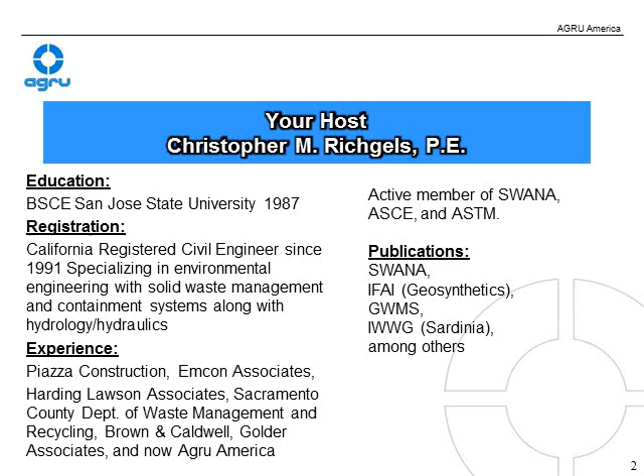I spent time with engineering consultants, Emcon Associates, Harding Lawson Associates, Brown Caldwell, Golder Associates. Also a stint in the public sector with the Sacramento County Department of Waste Management and Recycling, and I now consult to Agru America. I'm an active member of SWANA, ASCE, ASTM, and have publications in various trade shows and magazines as listed there.

Today we're going to have an introductory presentation on geosynthetic capping systems. This is part one of likely a four-part series on this topic. This first introductory phase is going to present some of the history of the geosynthetic industry and materials and how we got to where we are today, and just some of the issues involved with capping systems.

Now there's different capping system versions. First of all, there's geomembrane and soil composites. Pretty common, everyone's seen them. They're in use all over the United States and Canada and across the world. They, however, require soil depth suitable to the selected vegetative community required to hold the whole system, the topsoil system, together. Stability is based on veneer interface strengths.

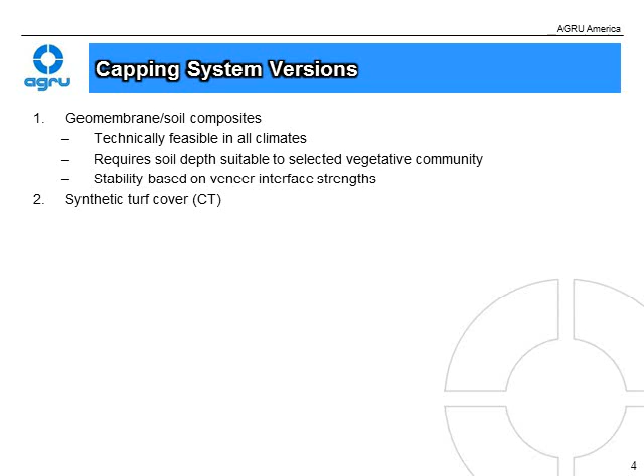And then there's the synthetic turf cover, or in Agru's case, the closure turf final cover system, wherein the synthetic turf replaces a soil erosion protection layer. It protects the underlying geomembrane from UV radiation, and stability is a lesser concern than with the geomembrane soil composite, other than landfill gas pressure forming beneath it.

In landfills, then there's exposed geomembrane covers. These are by far the cheapest alternative using geosynthetics. They are, however, subject to ultraviolet degradation, so they're really nothing more than a temporary cover. Stability is a lesser concern other than wind uplift, hence some exposed membranes you'll see anchored down with sandbags on ropes, or percussion anchors, called Platipuses, which can be driven into the subgrade soil to help hold the whole system down.

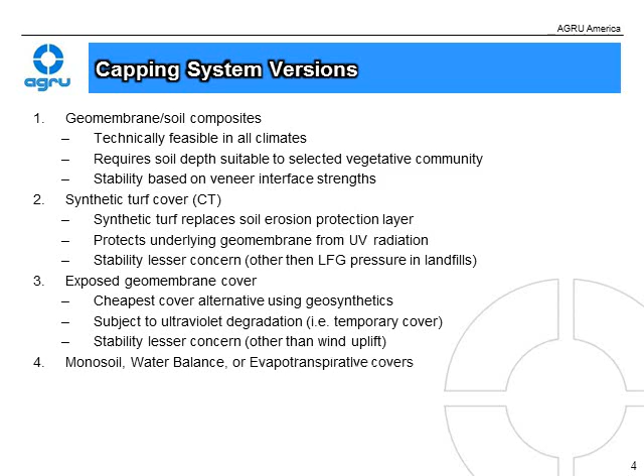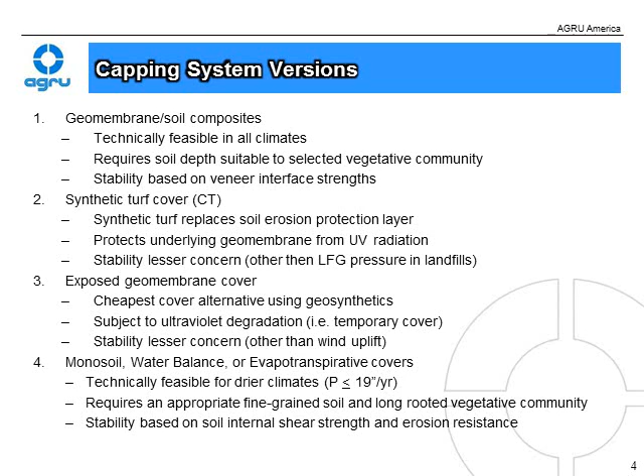Then there's the monosoil, or water balance, or evapotranspirative cover, depending on what theory you prescribe to. These are technically feasible for drier climates, in general those with an annual average precipitation of less than or equal to 19 inches per year. These systems require an appropriate fine-grained soil and long-rooted vegetative community, and their stability is based on soil internal shear strength and erosion resistance. Well, today we're going to focus on two of these in analyzing system stability.

First off is the geomembrane soil composite, and then the synthetic turf cover. And that's to answer the question: why is this important? Why is stability design so important?

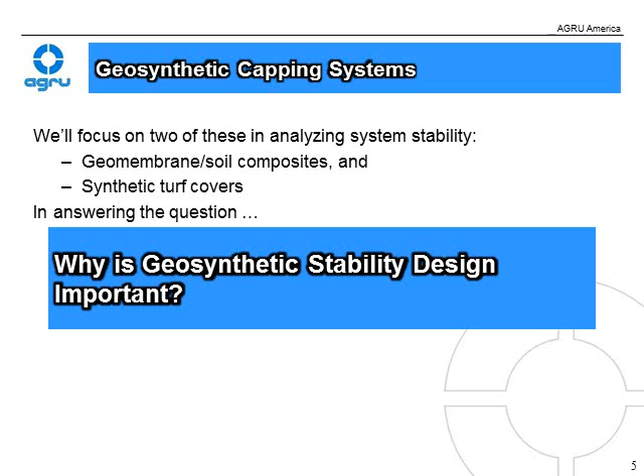Well, two words: Kettleman Hills. Kettleman Hills was a Class 1, or hazardous waste, facility in the south central valley of California, or the San Joaquin Valley. A desert-like region, very dry, very low rainfall, and it was a perfect location for hazardous waste materials.

Now the module in question was this one, module B19. Back in March of 1988, on the morning at 6:30 in the morning on March 19th, a half-inch crack was first observed on a truck ramp into the module. By noon, the waste mass had displaced by several feet.

It was a huge litigious issue. Emcon Associates was the design engineer at the time. I had joined Emcon Associates in the summer of 1988, just a few months after this occurrence. I had never seen so many lawyers running around a company before in my life, and neither have I since.

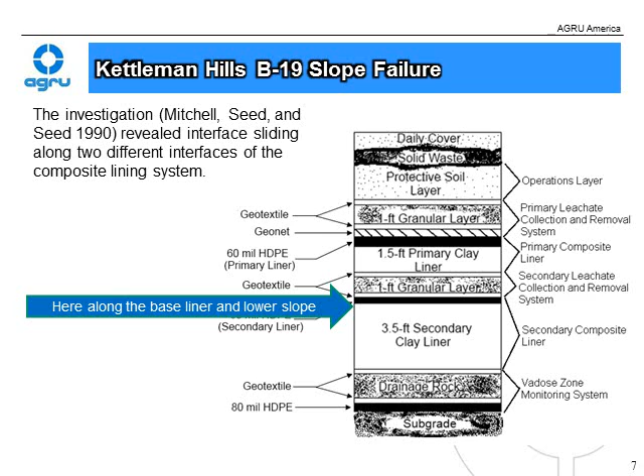At issue with the B19 slope failure was the fact it was a very complex composite liner system, with secondary liners, primary liners, assorted Vadose zone monitoring systems, and all sorts of interfaces. Now, one thing about all these HDPE liners: they were all smooth. Interface sliding along these interfaces happened in two locations. Along the base liner in the lower slope, it occurred between the HDPE geomembrane and the compacted clay liner.

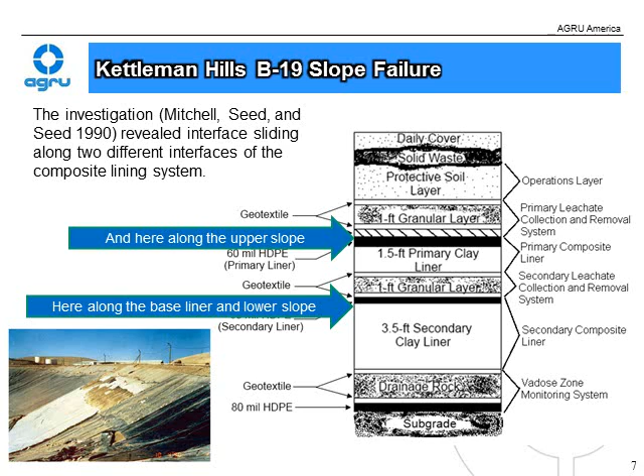Along the slope, it occurred between the geonet and the liner, another HDPE liner, and generally took many years and much court time later to resolve this whole situation. Or here's another two words for you: the Chrin Landfill in Pennsylvania had a slope failure in this location, and that is a headline that I would not want to have my name associated with.

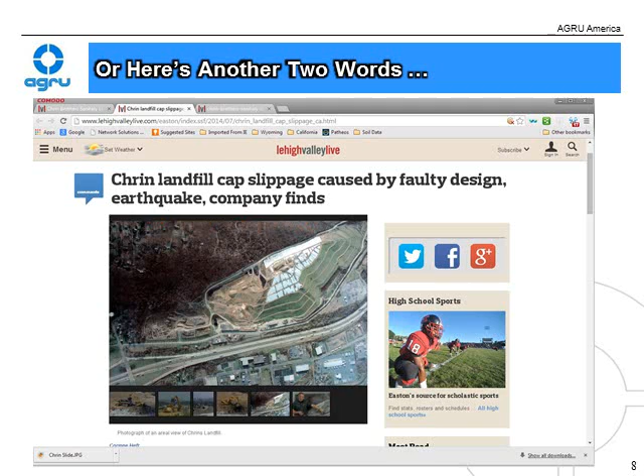Slope failures are a risk in any system, but they don't occur often, in short. The result of the Kettleman Hills failure in particular was improvements to testing materials used in these systems. In particular, adoption of the 12-inch direct shear test, or modern method ASTM D5321, was first adopted in 1992, about 4 years after Kettleman Hills.

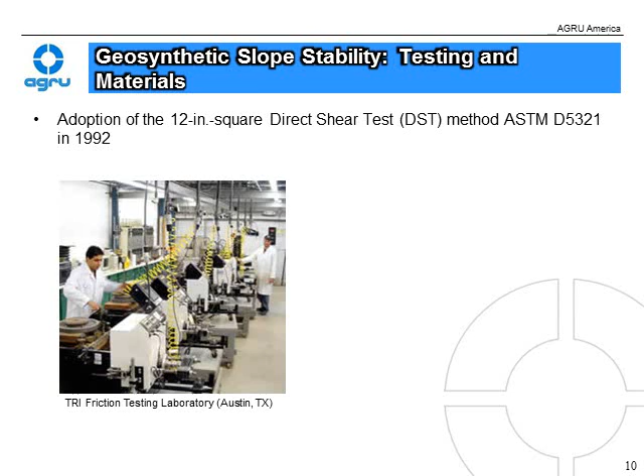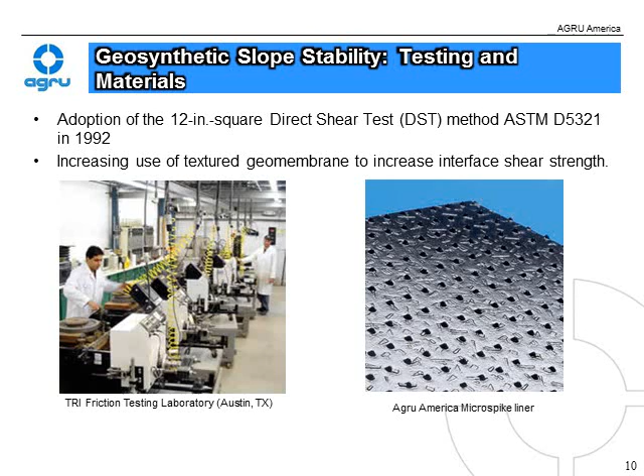Here's a picture of the TRI friction testing laboratory in Austin, Texas. They pretty much got this down to an assembly line. And then there's increasing use of textured materials. Here's a photo of Agru's MicroSpike liner. The purpose of the texture is to increase interface shear strength to avoid the slippage that occurred at Kettleman.

There's a couple of schools of thought on running a direct shear test. First, for the fixed interfaces, you'll see here that the first geomembrane is fixed on this side, and then the upper geomembrane is clamped on the other side, and then a shear force is applied with corresponding normal load to drag this geomembrane across this geomembrane.

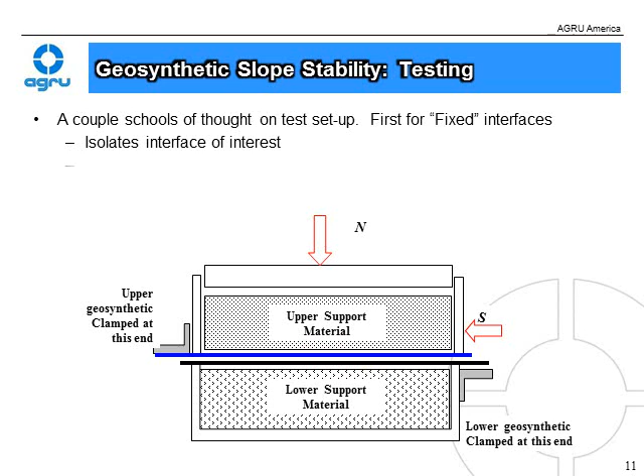One thing about this test style is it does isolate the interface of interest, this one. The flip side of that is: is this really a material shear strength test, or is it a material tensile strength test? What's to prevent, with this side clamped, a tensile force from developing in either this geomembrane or this one down here?

For the free interfaces, same test box setup, normal load, applied shear load, and then in a floating condition here's several geosynthetics: a geotextile, a geomembrane, a geosynthetic clay layer, and a geocomposite.

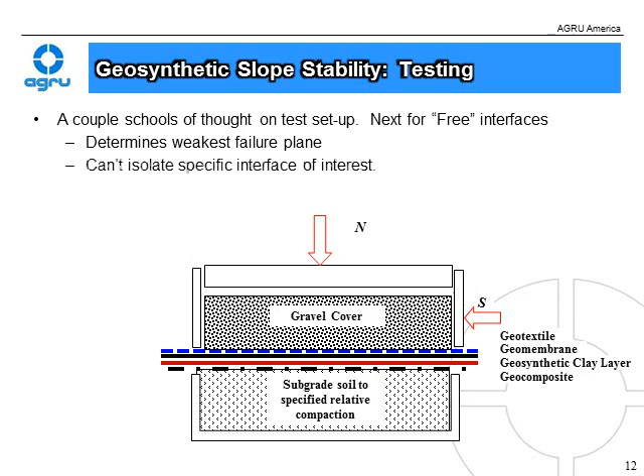This test method will determine the weakest failure plane between all of these interfaces that you see here: the gravel to the geotextile, any of these geosynthetics to each other, or the geocomposite to the subgrade soil beneath. It cannot isolate a specific interface of interest.

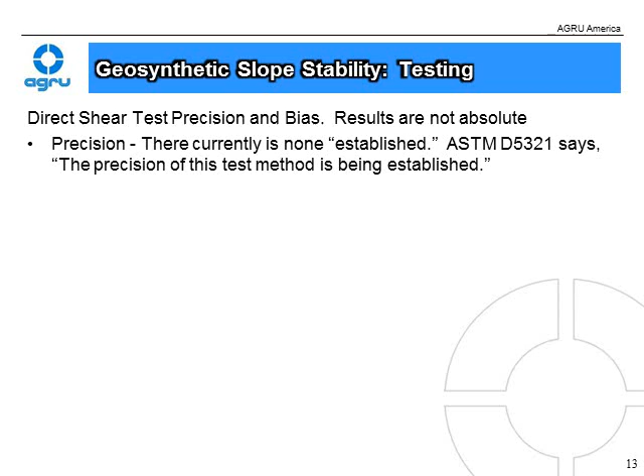As far as precision and bias, one thing you have to know about the direct shear test is results are not absolute. For precision, there's none established. ASTM D5321 says the precision of this test method is being established. It's said that since 1992.

Bias: there are no direct data to determine bias. What I mean by bias are differences in results between different labs or different lab technicians, who all have their different approaches to setting up the test box, or whether they properly compacted the soil or what have you.

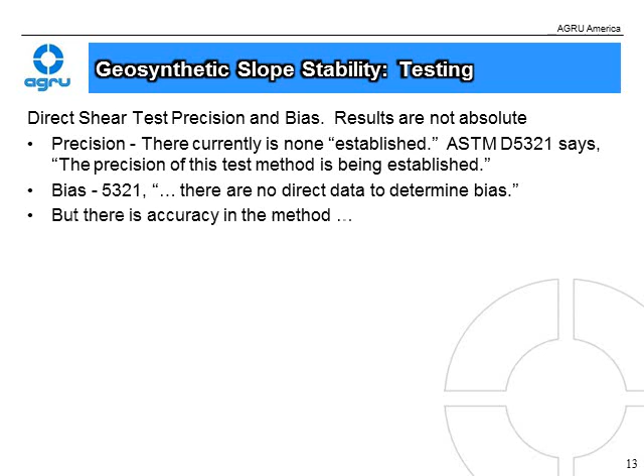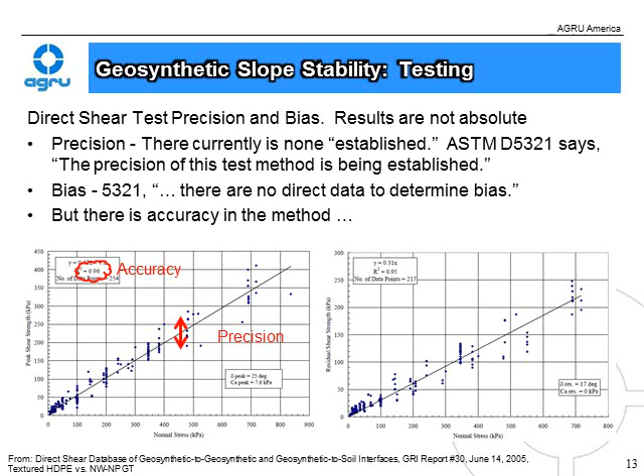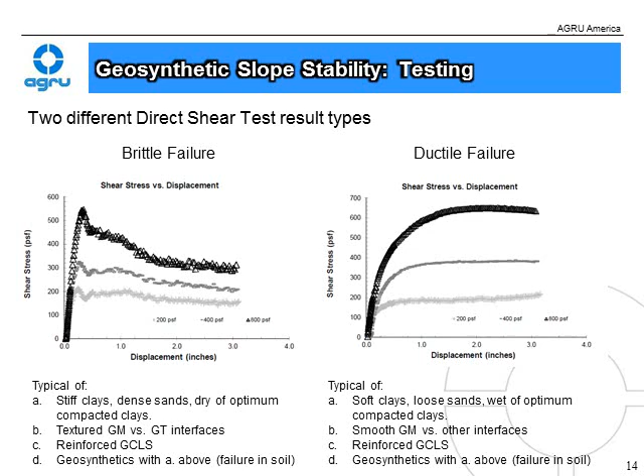Ductile failure is associated with soft clays, loose sands, wet of optimum compacted clays, smooth geomembranes versus other interfaces, and then reinforced GCL, so they can play both sides of that fence. And then, of course, geosynthetics with the soils listed above.

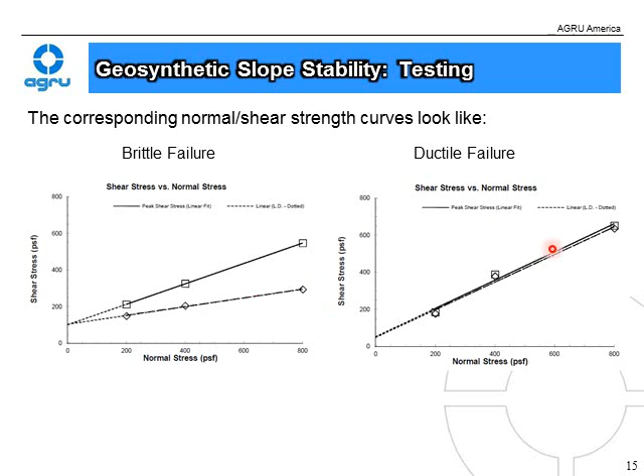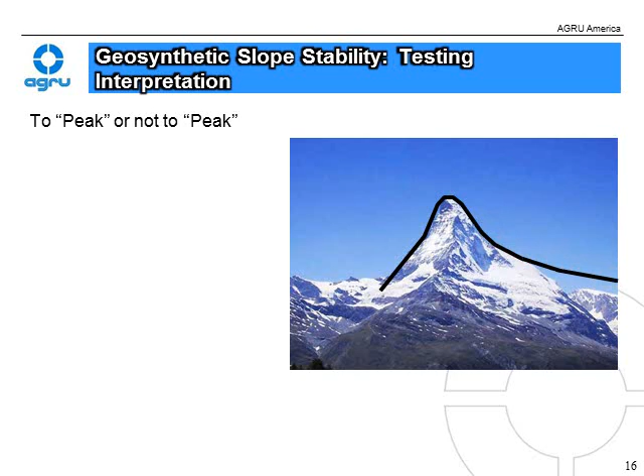Now, whether you use that peak value or not depends on the design parameters or engineering philosophy of your particular firm or organization. For example, some engineers ignore peak strength altogether in stability design. That's very true out here in the West, along in California, where we spell seismic with a capital S.

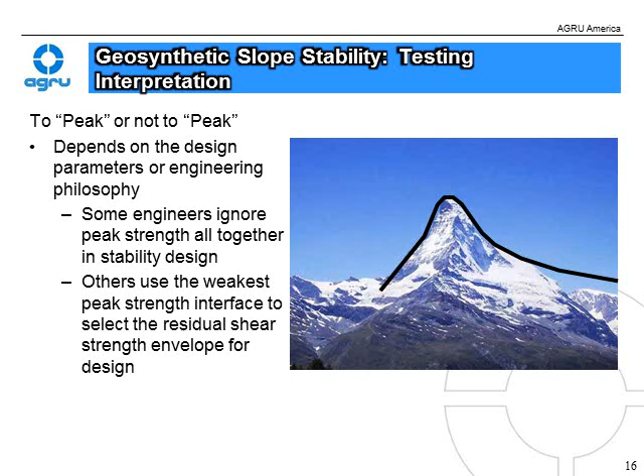Others will use the weakest peak strength interface to select the residual shear strength envelope for design. Both approaches have validity. It really depends on the particular philosophy of the organization you're with.

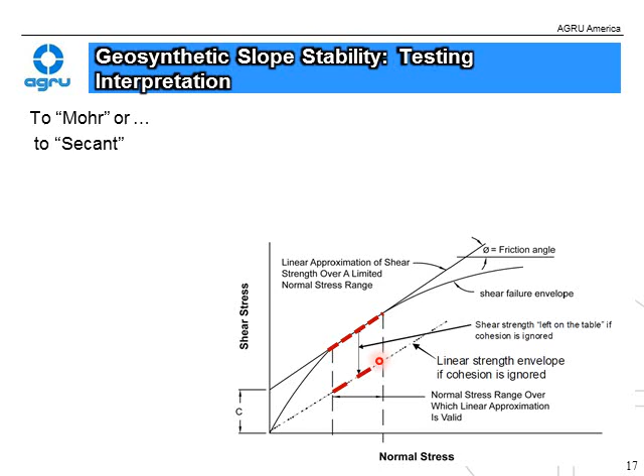Secant projects the strength results, strength versus normal stress results, through zero, so it assumes no cohesion or no adhesion. Again, it depends on the design parameters or the engineering philosophy of your organization. For interfaces with no natural adhesion, it really doesn't matter.

However, secant strength can be determined from a single point. There's two schools of thought on this. One thing secant will do through a single point is give you a much higher shear interface angle - as you can see, this angle versus this one is steeper. What you do lose performing this type of strength calculation is that at these lower normal loads, you're losing some design shear strength.

One thing all engineers will agree on is do not project either below nor above the DST data points. The reason being, the Mohr envelope, or shear failure envelope, is actually more like a curve than a straight line. So these points are defining a sector or segment along this curve. It's not a true 100% accurate representation, but it works well enough.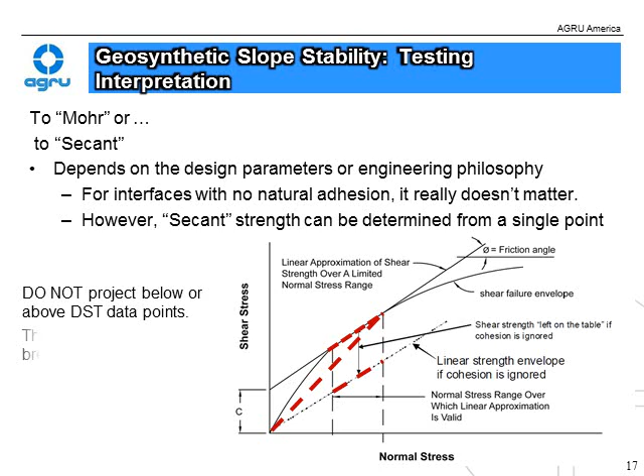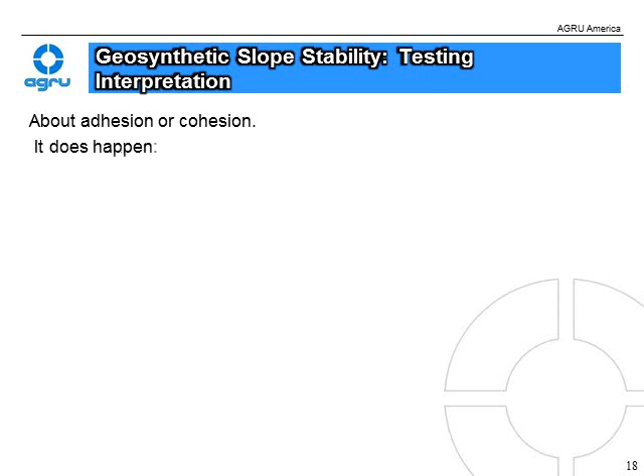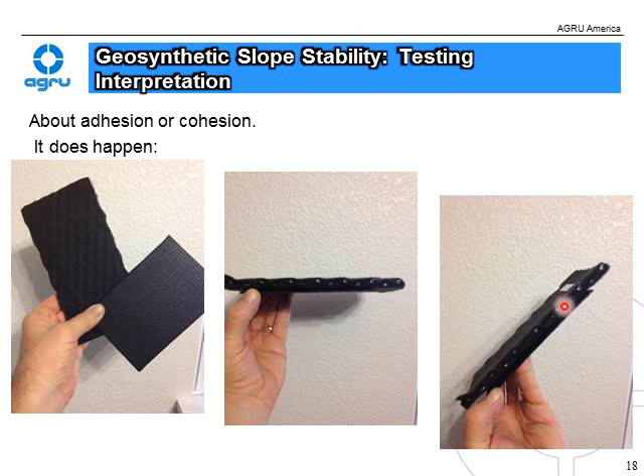Now, a little bit about adhesion or cohesion - well, it does happen. Here's a sample of a geocomposite and a sample of Agru's MicroSpike. Lay the geocomposite on top of the MicroSpike at horizontal and then tip it. You can see there is some natural adhesion between these two as the fibers of the geocomposite get stuck on the texturing. This is also known as the Velcro effect. Its design value is not clear.

The Velcro effect is more prominent with blown film textures. It'll require the use of a rub sheet when installing over a geotextile material, or installing a geotextile surface on the blown film sheet. That means more installation dollars, simply from the crew time required to move those materials around.

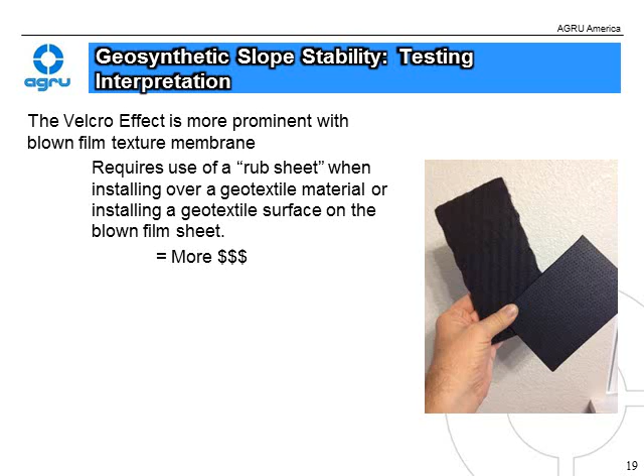Now, you might think that's good for shear strength, but you have to remember, unless the design has a normal load of zero, the Velcro effect may serve no useful design purpose. If the shear strength envelope of your system behaves like this, all the Velcro effect does is get in the way of installation, really.

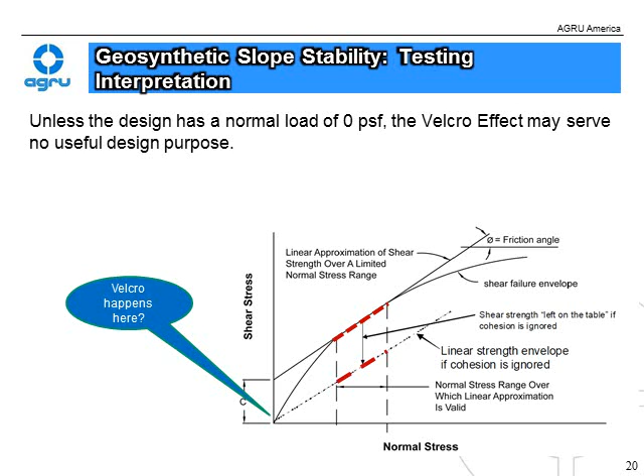Now, towards construction of geosynthetics. First thing I'm going to show you here, with geomembranes, in particular polyethylene geomembranes, is the double wedge weld. This is a thermal weld where this machine produces a weld that looks something like this in profile. The lower sheet and upper sheet are fused together here and here, leaving an air pocket in between them.

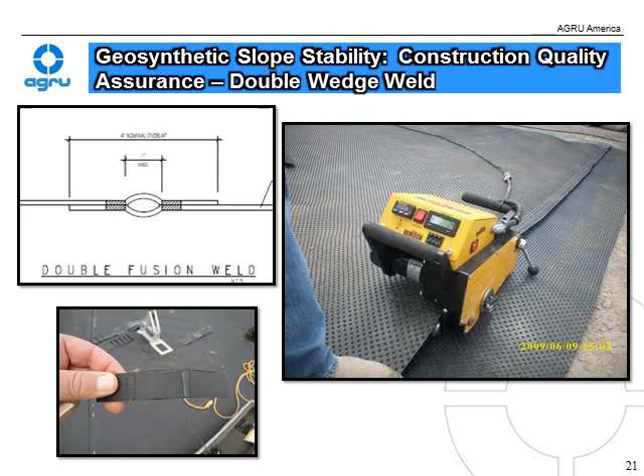And then a cut strip from that weld looks something like this. You can see that fusion weld on this side, and then over here on this side, with the air channel in between them. Now what do you do with that air channel? Well, you pressure test it.

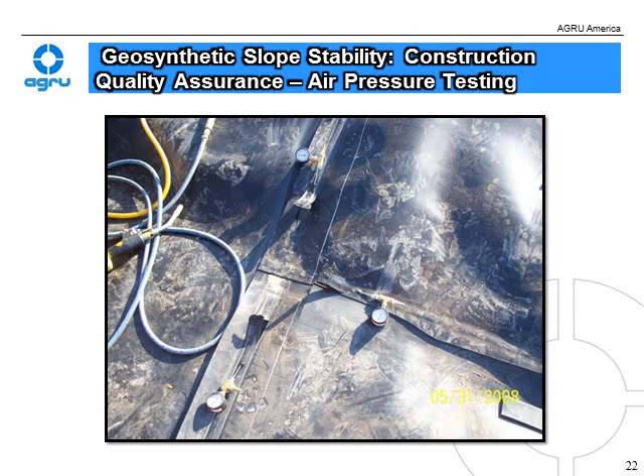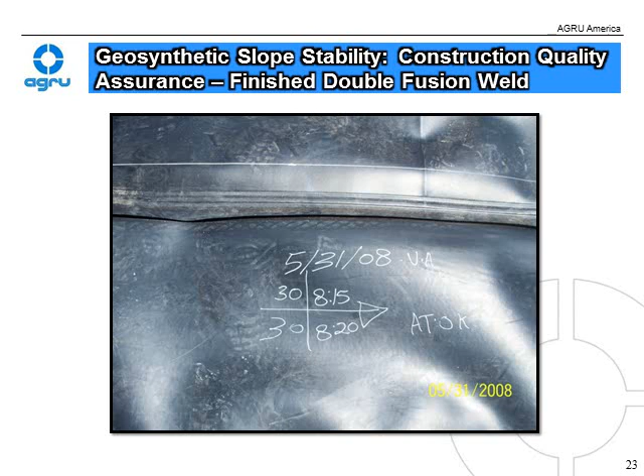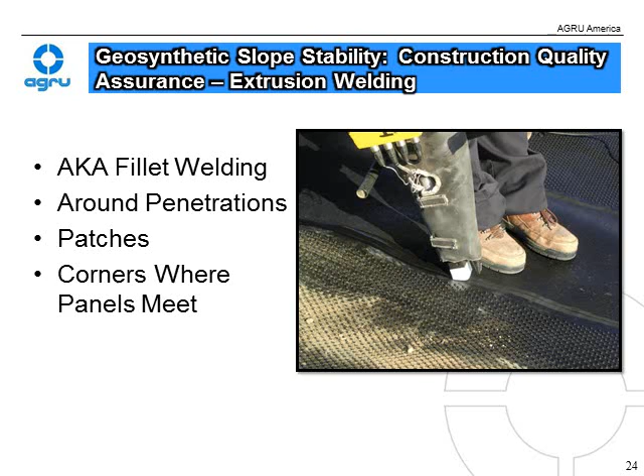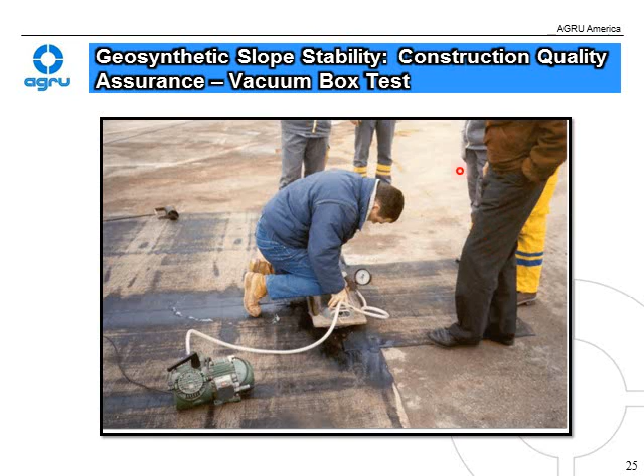The other welding technique is extrusion welding, otherwise known as fillet welding. You'll find this done around penetrations, for patches, where destructive samples are taken from the double wedge welds, and corners where panels meet. Here's an example of a construction quality assurance test on an extrusion weld or fillet weld - it's a vacuum box. It simply applies a soapy solution over the seam, then applies a vacuum and watches for soap bubbles bubbling up around the weld. And of course, this test method needs 4 to 5 supervisors all standing around watching it done.

Now here's where you'll find extrusion weld locations. You'll find them around, say, this penetration here, a landfill gas vent of some sort, leachate collection system sump riser, vadose zone monitoring sump riser, other control panel installations, and I suppose a fire extinguisher would always be a good thing to have around a landfill.

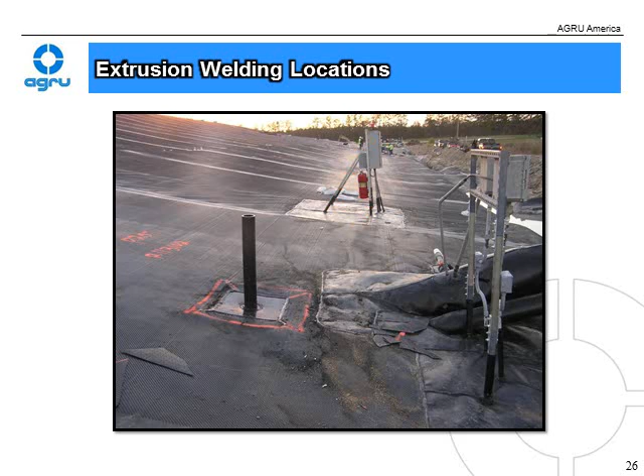Some other basics for you are specifications for geosynthetic materials. A lot of these have been developed by the Geosynthetic Research Institute. You'll see here GRI GM13 for HDPE geomembranes, GM17 for linear low density polyethylene geomembranes, and a host of others. Geotextile separators, GT13, GCL3 for geosynthetic clay liners, and then other procedures or test requirements for seams on the geomembranes.

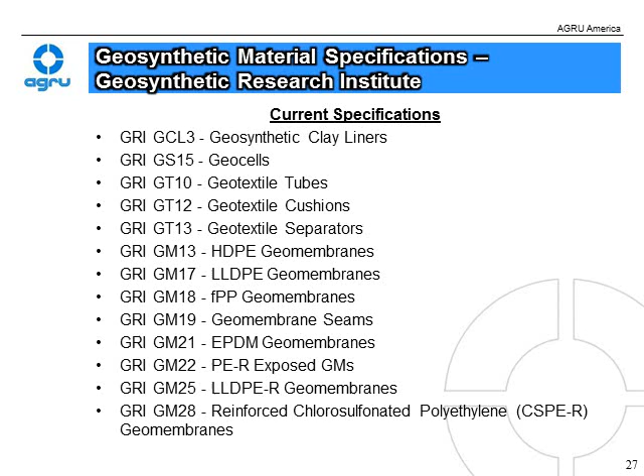Here's a table out of one of those specifications - this is for high density polyethylene. It has specifications for thickness, asperity height, or the height of the texturing, the density of the material, tensile properties, yield and break, tear resistance, puncture resistance, stress crack resistance, oxidative induction time. That's really a topic for another webinar, but basically how long this stuff will last in an exposed condition. And then carbon black content, which is all intended to accommodate the oxidative induction time.

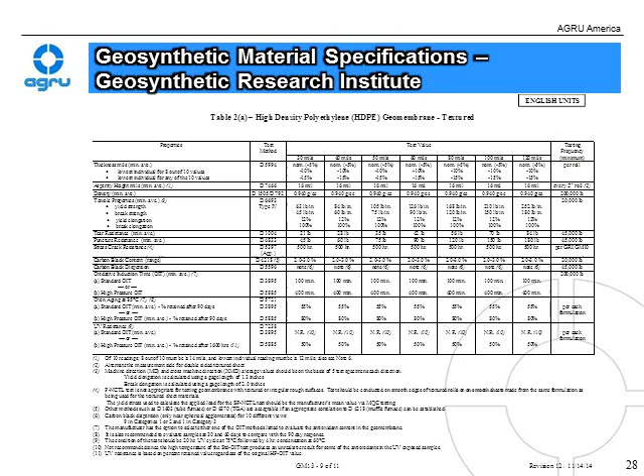You'll probably see a lot of these more established firms - these are already written into their material specifications. This is pretty much a standard throughout the industry.

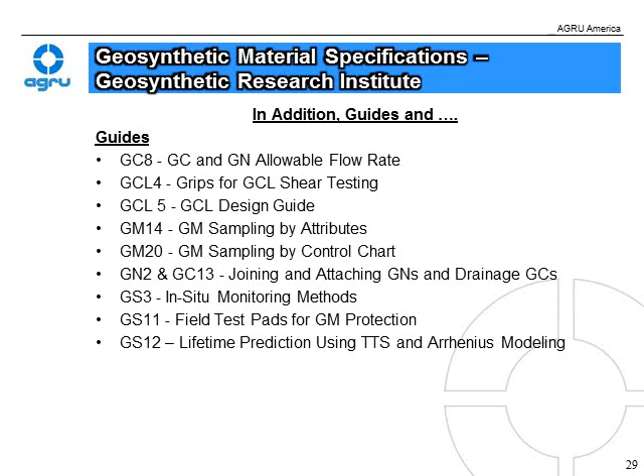The GRI also produces guides such as GC8 for geocomposite and GeoNet allowable flow rates, which we'll cover in the next webinar. There are also GCL design guides, sampling techniques for GM geomembrane sampling, field test pads, and lifetime prediction of geomembranes using time-temperature superposition and Arrhenius modeling, another webinar topic. In addition, there are recommended practices covering geotextile design strength, cold weather seaming, and a variety of others. All of these can be found at the Geosynthetics Institute website, located at this location.

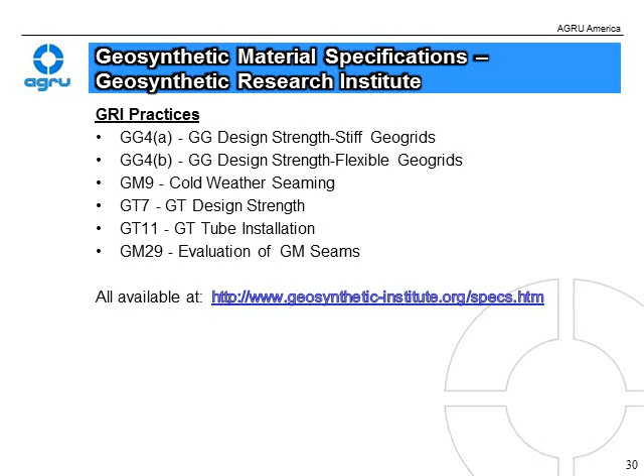Now, a little bit about the final cover veneer that we're going to leap into boldly next time as far as subsurface draining goes. First, let's start off with the rules, or permitting.

All the final cover permit regulations and requirements have a basis in Federal Subtitle D. This is an overarching closure requirement for municipal solid waste landfills within the United States and its territories. These regulations have also found their way into Canada, although Canada does not have an overarching federal authority like we do in the form of the EPA, and have also been adopted elsewhere in the world.

First of all, Subtitle D requires all owners and operators of municipal solid waste landfill units to install a final cover system designed to minimize infiltration and erosion. The final cover system must be designed and constructed to have a permeability less than or equal to the permeability of any bottom liner system or natural subsoils present, or a permeability no greater than 1 times 10 to the minus 5 centimeters per second, whichever is less.

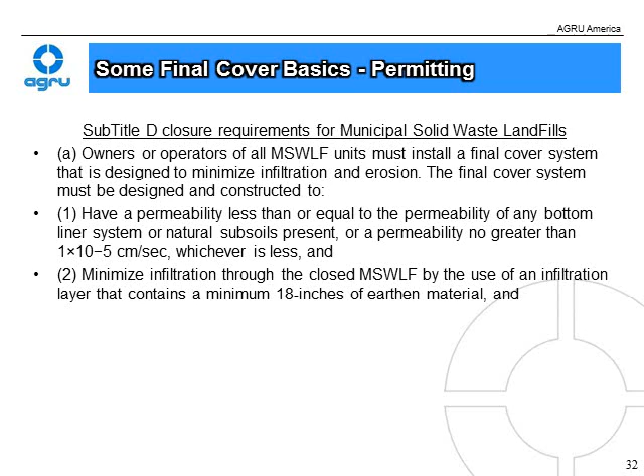It must minimize infiltration through the closed landfill by use of an infiltration layer that contains a minimum 18 inches of earthen material at that permeability, and minimize erosion of the final cover by use of an erosion layer that contains a minimum 6 inches of earthen material capable of sustaining native plant growth. That's essentially it. Alternatives are allowed in a following clause.

Some states have added requirements, such as Connecticut, California, and New York. Viewers from Canada and elsewhere in the world may recognize some of these requirements in their own environmental regulations, in Canada as adopted by the specific provinces.

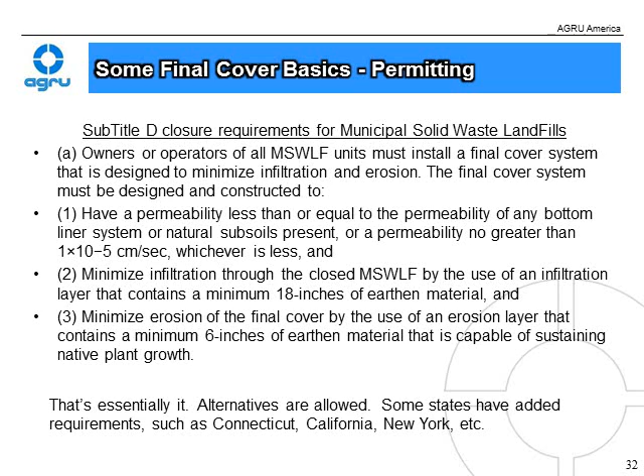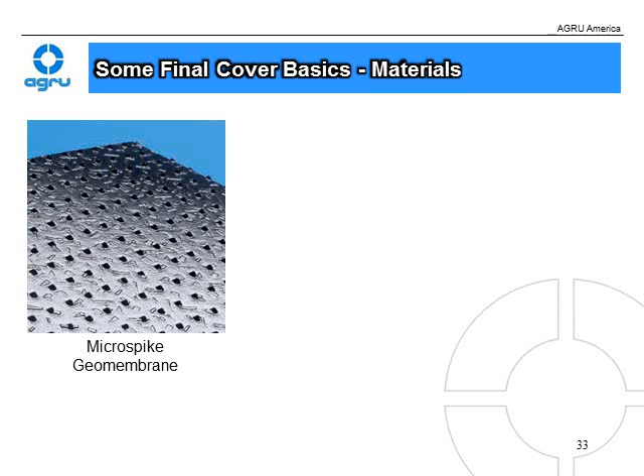A little bit about the materials. Here's Agru's MicroSpike geomembrane, for really aggressive designs with a lot of shear strength requirements.

There's also the Super Grip Net geomembrane. This is a combination, I call it a combination geomembrane and geonet. Studs on this side act as a drainage layer, and then these grips on the downside will dig into the subgrade soil and generally deliver much higher shear strengths.

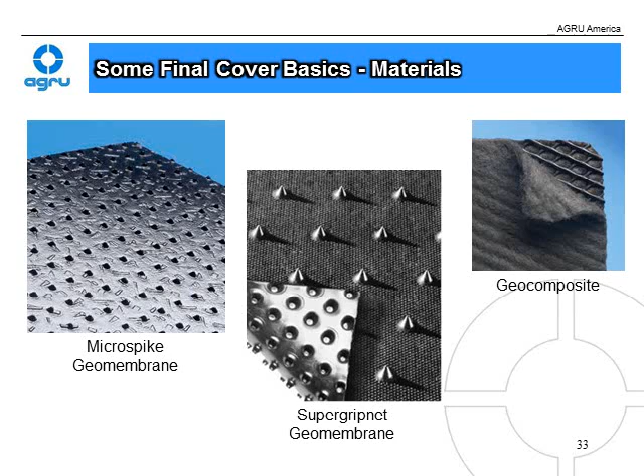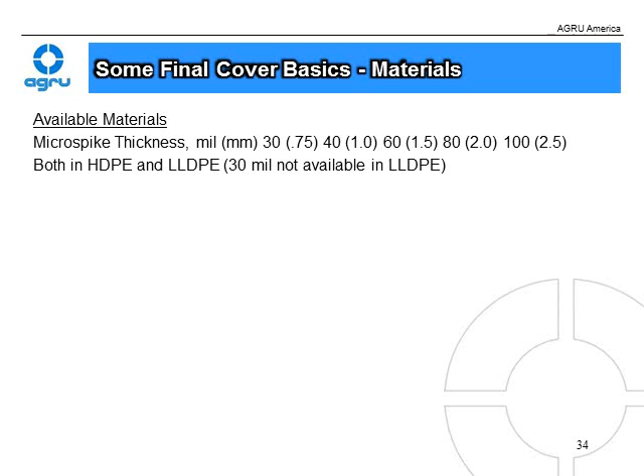And then, of course, there's geocomposites for subsurface draining. Now of those materials, MicroSpike comes in thicknesses from 30 mil to 100 mil, in both high-density polyethylene and linear low-density polyethylene, except 30 mil is not available in linear low-density materials. Super Grip Net, or drain liner, thickness is available from 50 to 100 mils in both resins, and both include the integrated drainage system, or IDS as we call it.

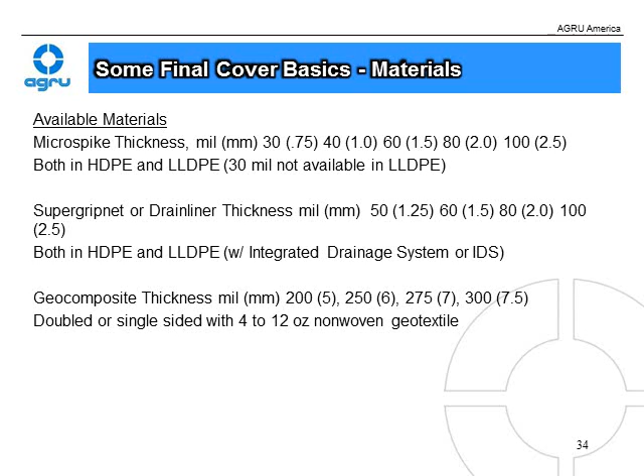The geocomposite thicknesses range from 200 to 300 mil, and come either double or single-sided with 4 to 12 ounce non-woven geotextiles heat bonded to one or both sides, or neither side in the case of a geonet. The integrated drainage system, particular to the Super Grip Net or drain liner products, has a minimum thickness of 130 mil.

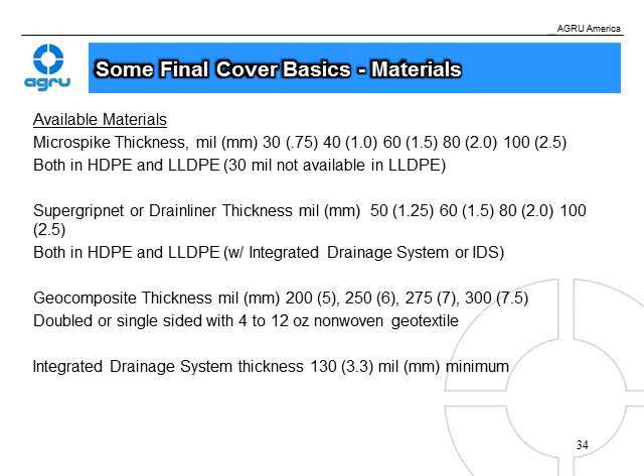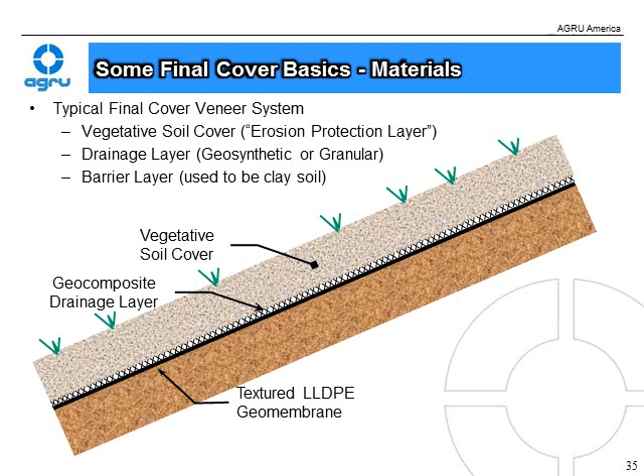The barrier layer used to be clay soil and is now generally a geomembrane, a textured linear low geomembrane depicted here. The reason clay soils are not used so much anymore is that studies have shown they don't do well under differential settlement with landfills. Their strain elongation is generally about 2%, which means they crack easily, and vegetation growing down through them can desiccate them, leading them to shrink and crack. In general, they just don't seal up well over the long run.

And then finally the subgrade, or as we call it here in California, the foundation layer, upon which all of the above is built.

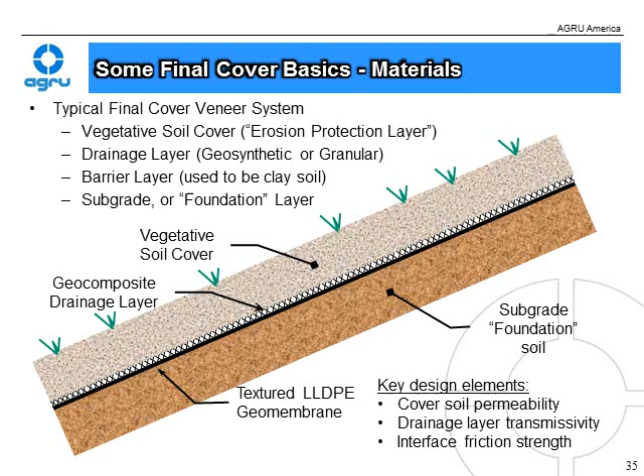Now, some of the key design elements for this system are cover soil permeability, or the ability of water to flow through this cover soil into the drainage layer, and then transmissivity of that drainage layer, or its ability to take that water percolating through and drain it away such that the cover soil does not become saturated. That's next webinar. And then there's interface friction strength between all of these components. Those are the three really key design elements. There are others, but these are really key.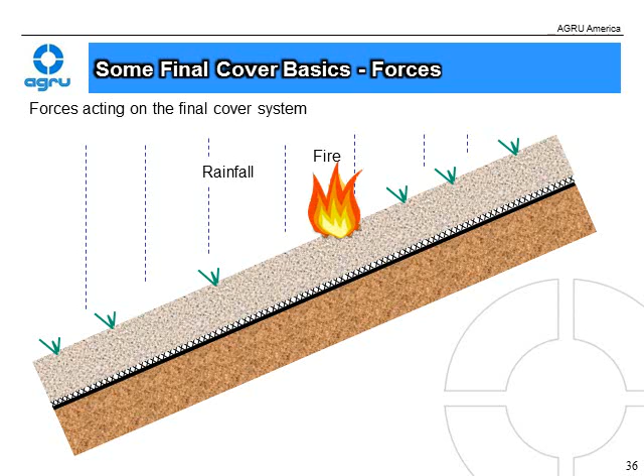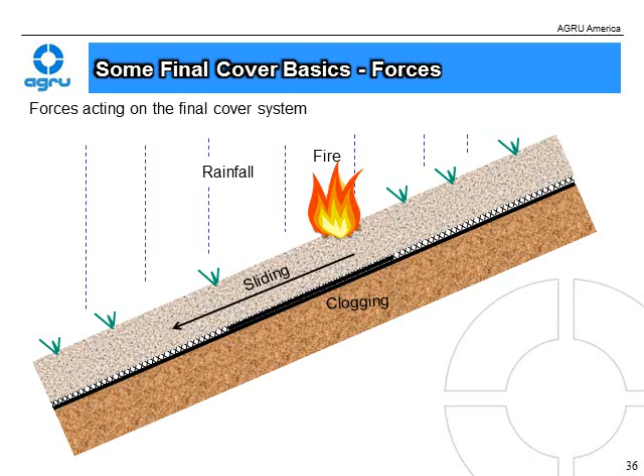Now, some of the forces acting on that final cover system are, first of all, rainfall, fire, not campfires but wildfires, sliding of the cover soil or other components against each other, clogging of the drainage layer, be that a geocomposite or a granular drainage layer, and then landfill gas generation beneath the system, which will tend to lift it all up and away from the subgrade soil interface, erosion of the cover soil, settlement of the entire system, and conditions such as here in the West and a few other parts of the country, the United States anyway.

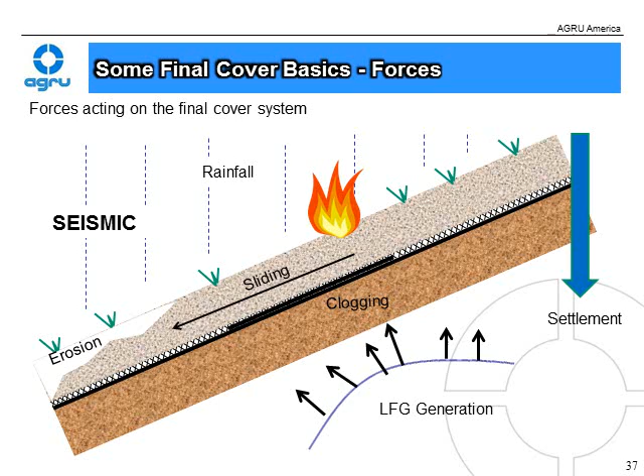Now, some of the basic forces: there's sliding, in which case this final cover system, the soil on top of this final cover system, just slid right off the geomembrane. And there's rainfall erosion, such as this mess, or what you'll more likely find on a system, a deep rill erosion down to the barrier geomembrane. A lot of that is made even more critical by just how difficult it can be to get a viable vegetative community thriving.

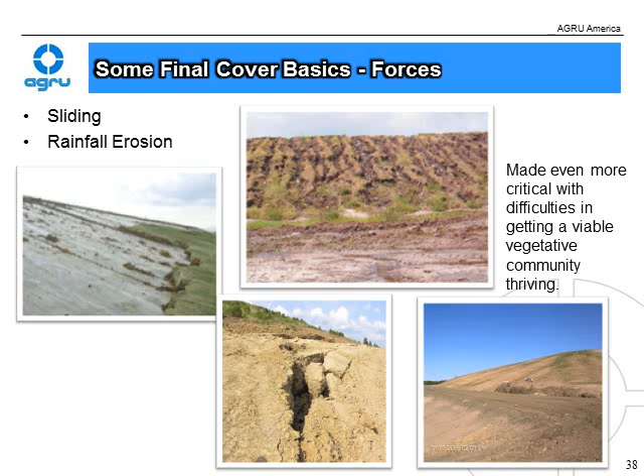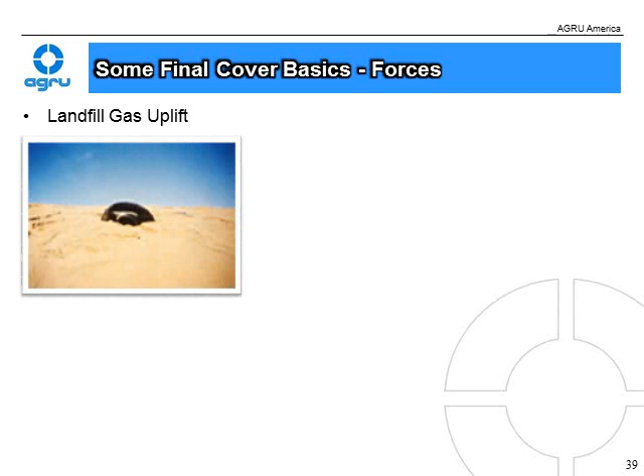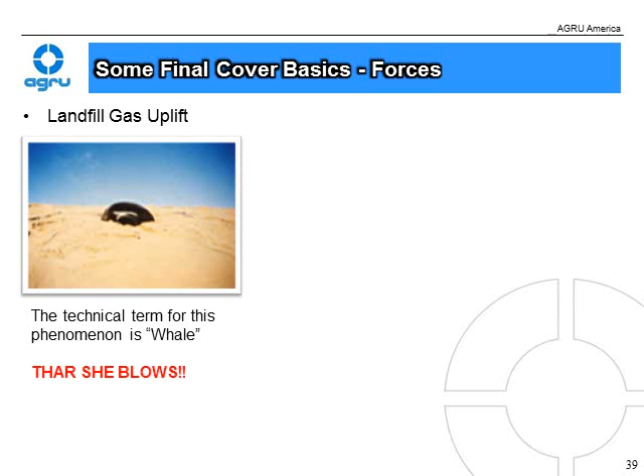Then there's landfill gas uplift. The technical term for this phenomenon is a whale. This is a section of geomembrane that popped through an overlying soil cover and produces this nice pronounced gas bubble. There she blows. And then there's this phenomenon with landfill gas uplift - you'll see here shredded remnants of a geomembrane and some other components conspicuously absent. The technical term for this phenomenon is just plain ouch.

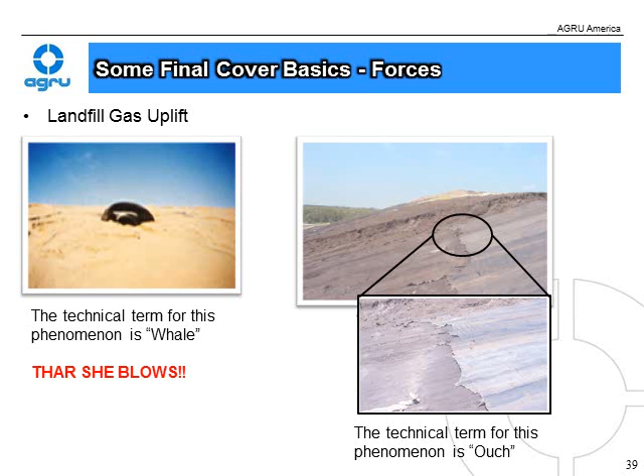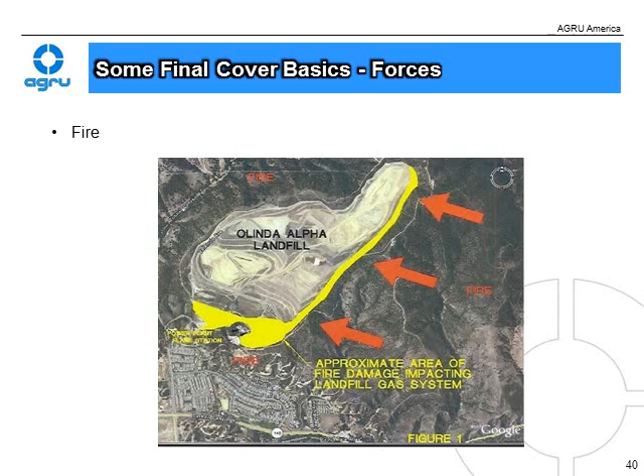Then there's flooding, the 1,000-year flood versus the 100-year flood. There are provisions for cost estimates for tsunamis, applies to a handful of sites in California. Seiches - a seiche is a back and forth wave on a lake. Then there's precipitation, the 1,000-year 24-hour precipitation versus the 100-year 24-hour precipitation, and fire. Some in the state have accused this of being an underground regulation. In certain circumstances, it's probably good to have money set aside for things like this. These are basically unpredictable events - they happen, they're not common, but when they do happen, they cause a lot of damage.

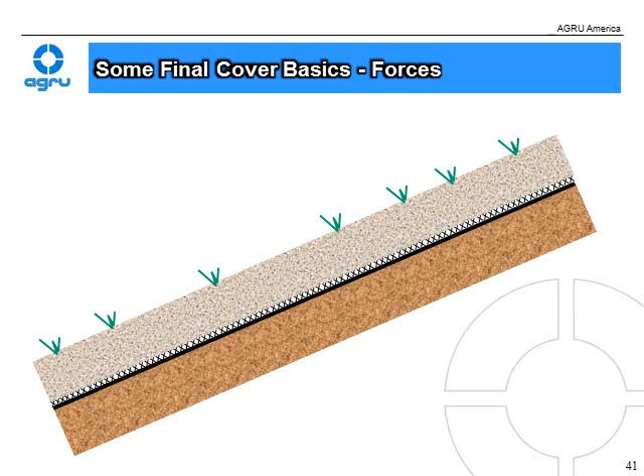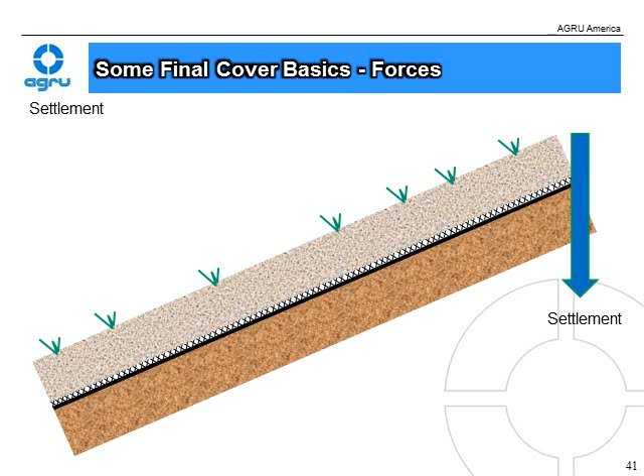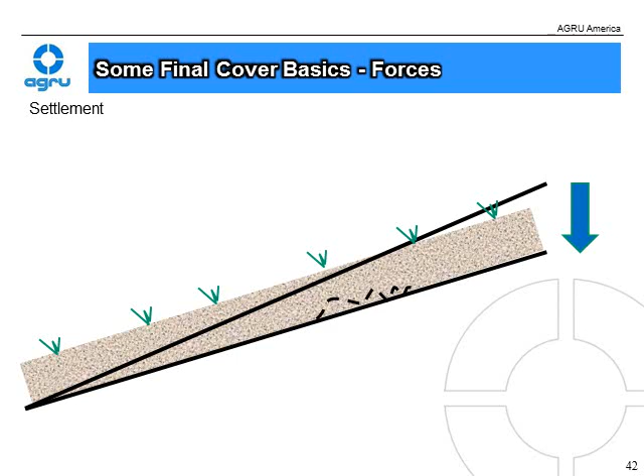Another force that occurs on a final cover system is settlement. This can be an unseen, destabilizing force on system subdrainage. What that means is that water flowing down this slope, whether there's a drainage layer present or not, is going to encounter a depression and start to pond, creating a saturated layer of soil beneath the surface that won't be observed. This can create instability in the cover soil and weaknesses in these interface interactions, generally leading to an unstable condition. How significant that is, there isn't any documented case load yet, but it is a risk.

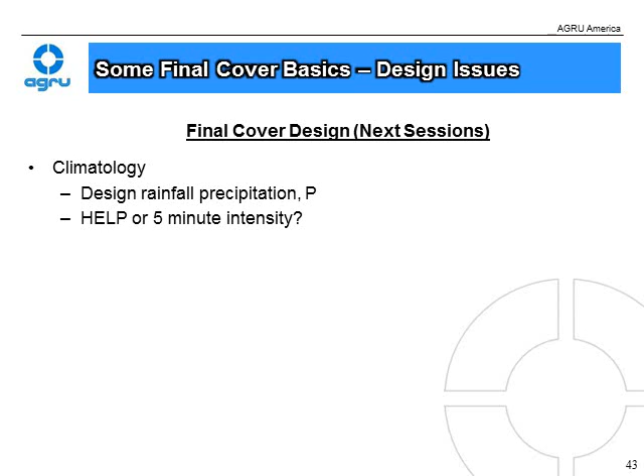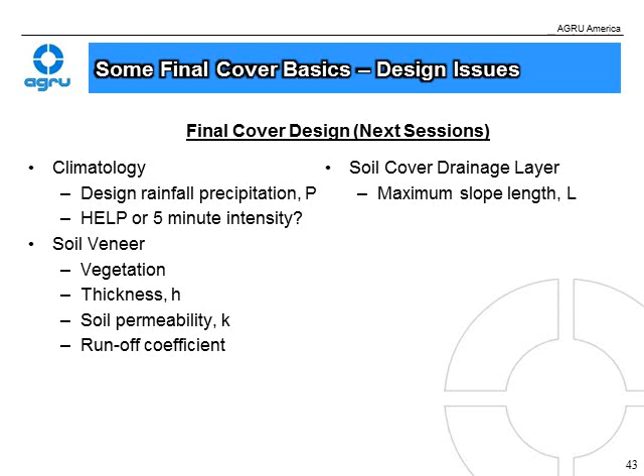For the next webinar sessions - again, this was just an introductory session - we're going to talk about climatology: what design rainfall precipitation should be used on final cover design, should it be the HELP model or the 5-minute intensity. Soil veneer: we'll talk about vegetation, the thickness of that soil veneer, the permeability of that soil, runoff coefficients, and then soil cover drainage layer - maximum slope length L allowable for the capacity of that drainage layer based on its transmissivity, also its interface shear strength. And then geomembrane as a barrier, interface shear strength static and seismic - those will likely be 2 separate webinars. Landfill gas pressure relief systems, and also settlement. Those are all in the next 3 to 4 webinars, most likely 4 to come, or 3 to come following this one.